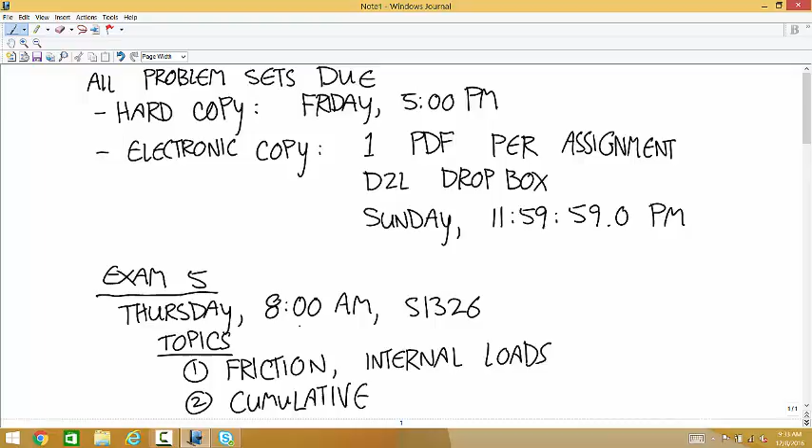And actually, we didn't do internal loads on the last one either, but you get the idea. So I said friction because you haven't turned in an assignment with friction. Some of you are like, I haven't turned in any assignments. But there's no assignment with friction on it. You're responsible for those problems yourself. It would be a really bad idea not to go through those problems, even though you're not turning them in.

And office hours next week. I'm going to keep the same ones. They'll work pretty well for the final schedule. So that's Monday, 3 to 6 in S1324. Tuesday, 1 to 2 in my office, 2302. And Wednesday, really it's 5 to 6. Let's say 3 to 6 in S1324. So I'll do the 2 extra hours on Wednesday. Usually that's short on Wednesday because I have a lab, but not next week. So you got a lot of chances to talk about this stuff before Exam 5.

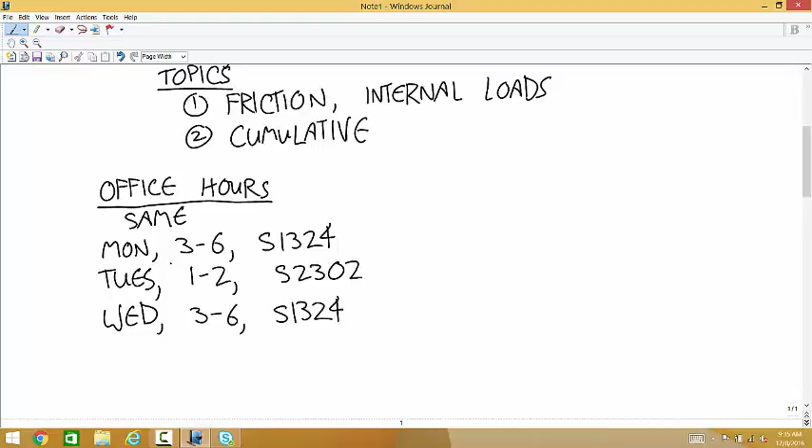Just to make things interesting, though, office hours next week, half the stuff I tell you is going to be wrong. Okay? Just to sweeten the plot thickens. You want to see if you can correct him? Yeah. And tell us the correct answer after. Okay, I'll tell you the right stuff. Any questions about anything the rest of the semester?

All right. So today we have to finish talking about friction. If we have time at the end of class, I'd be happy to talk about questions on homework or whatever, but let's make sure we get through the material we need to. So all that's left in friction is bearings.

And there are two types of bearings. Journal bearings, and here's what journal bearings are. You can think of it as like a pin joint is a journal bearing. Something that bears load. The two that we are going to deal with both involve rotations of axles. Okay, so what we have is an axle that's rotating in like a pin joint, you can think of it.

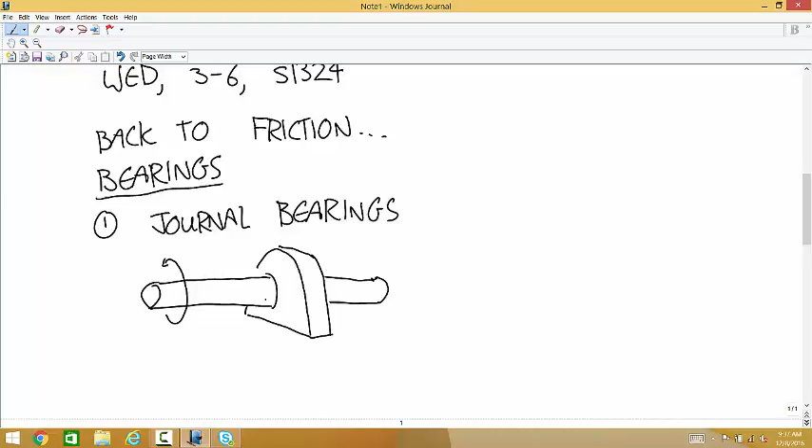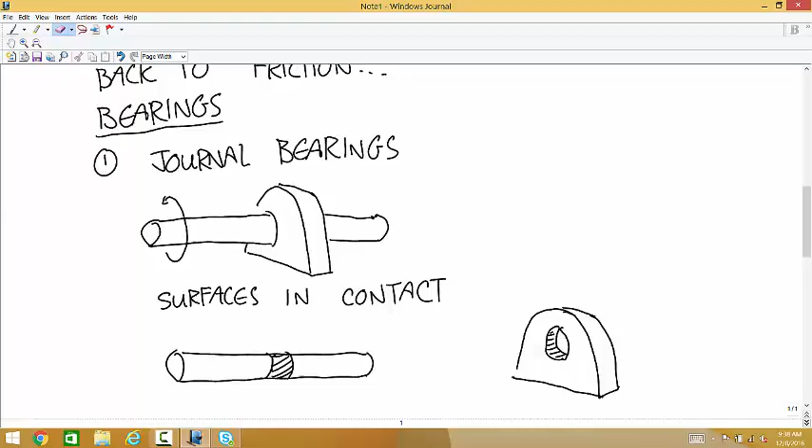And the surfaces of contact on the axle is this all the way around. And on the bearing is this. Okay, that's a journal bearing.

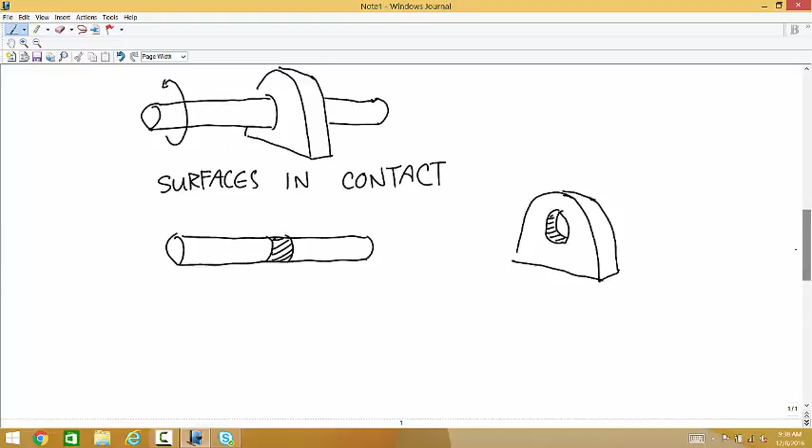And then the second type is a thrust bearing. And in that one, the axle's rotating this way. Well, it can be rotating either way. There has to be some force causing a contact between this and, in this case, say we're talking about like a wall.

It's hard not to draw that picture and make it look a little inappropriate, but let's all try to be mature people about this. So let's say we have this force. I was about to name that force P. I'm not going to do that. Again, because I'm so mature.

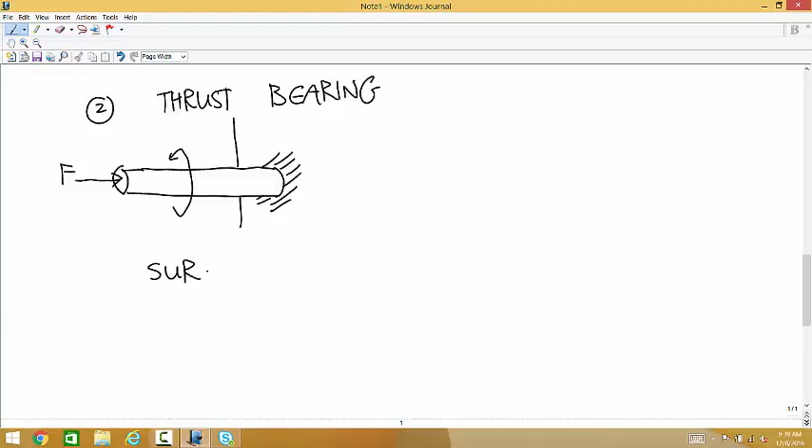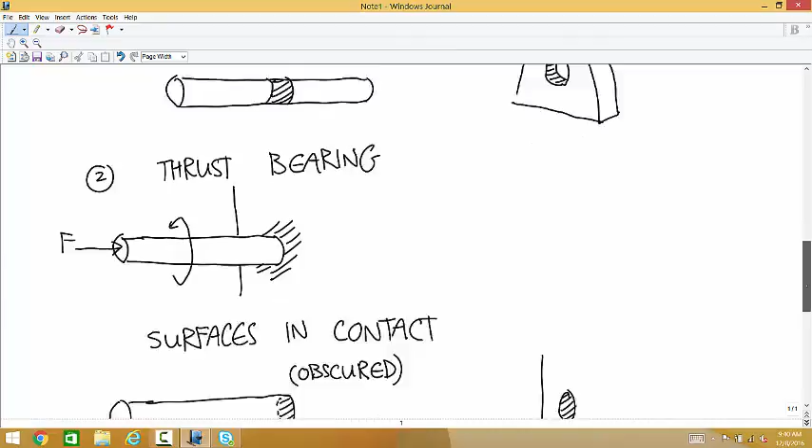And the surface is in contact. On this axle, well, the surface that's in contact on the axle is obscured, but it's this. And on the contact, it's this. Can everyone picture what these two different types of joints, these two different types of bearings are doing? I want you to notice one thing.

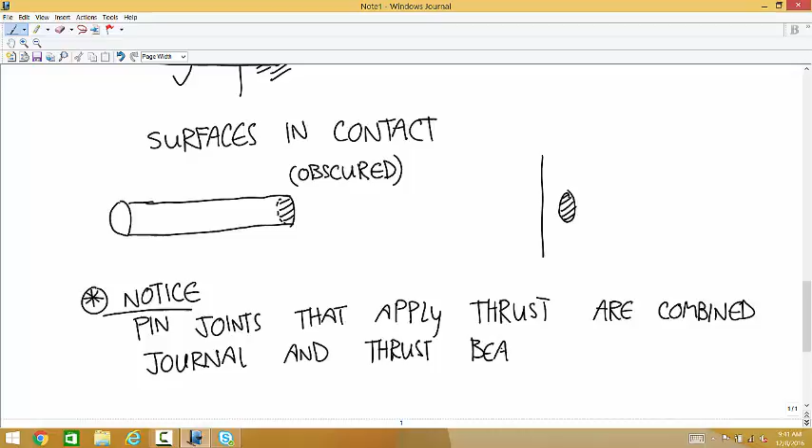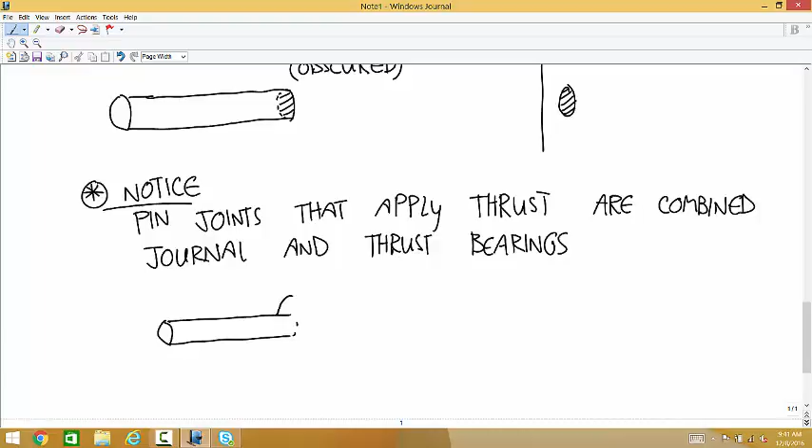Pin joints that apply thrust are combined journal and thrust bearings. So like an example would be, okay, so there's a little flange on here that keeps this from sliding this way or that way.

And if there's a force pushing these two together, I'll draw it here. Then, you know, as long as there's always going to be some kind of friction between surfaces. There's a contact surface between the inside of the pin and the outside surface of the axle. That's the journal bearing. And there's also contact between the wall of the bearing and the obscured side of that flange, and that's the thrust bearing. And then you'd have to deal with both of those two types of friction.

Yep. And when you say the obscured side of the flange, you're talking the inside. The inside, the part that's touching that bearing. Okay, so let's start with journal bearings.

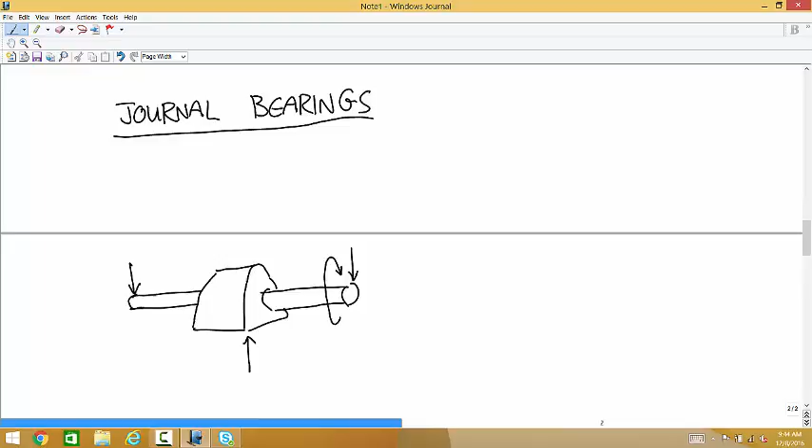Okay, so journal bearing, drawing it the other way, just to show off. And let's say it's rotating this way. And let's say that there is a force applied to each end of the axle. And there's a force applied to the bearing that's equal and opposite. So let's call this the weight W, and we'll call this W over 2, W over 2.

Let's think about it like this. This is fixed to the ground. That bearing is just attached to the ground. And so there's something applied up above whose weight is distributed on the two ends, and they're being supported by the fact that this bearing can't sink into the ground. Oh, so it's just a reaction to the floor. Yeah, right. And we're going to take a view like this. Poor sucker.

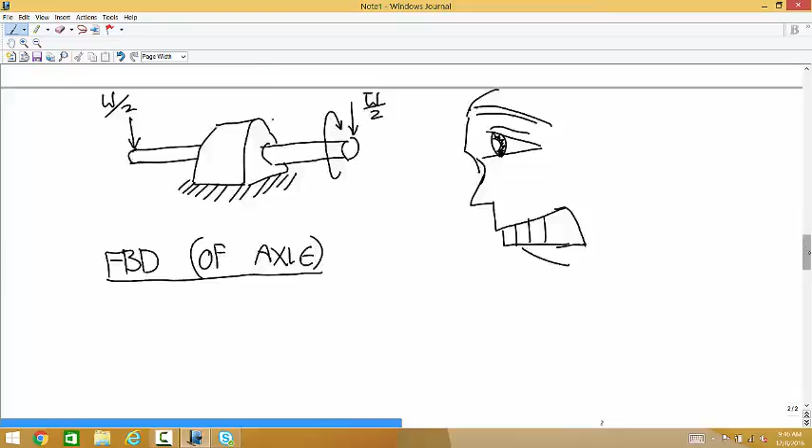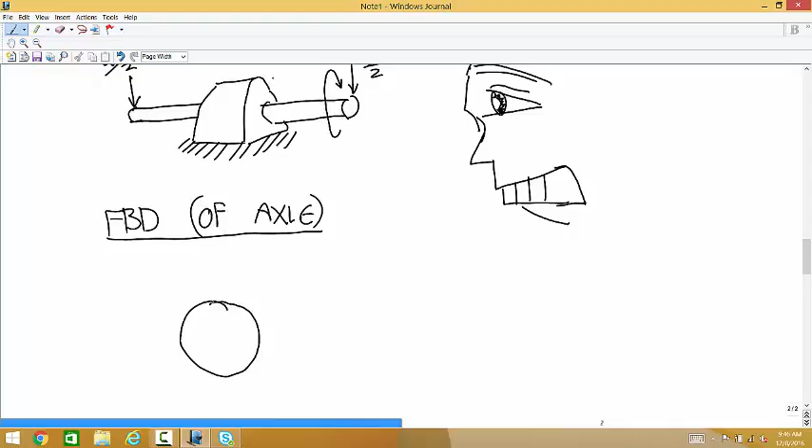Okay, and we're going to draw a free body diagram of the axle from his point of view. So what he sees is this. He's just looking straight down the axle. If we're doing a free body diagram of that whole axle, we have two of these forces, W over 2 plus W over 2 is equal to W. The axle is rotating this direction. And if there was no friction at all, the reaction force from the ground would be applied straight up through the center. Okay, and that would be static equilibrium. This spinning would happen freely forever with no additional torque applied.

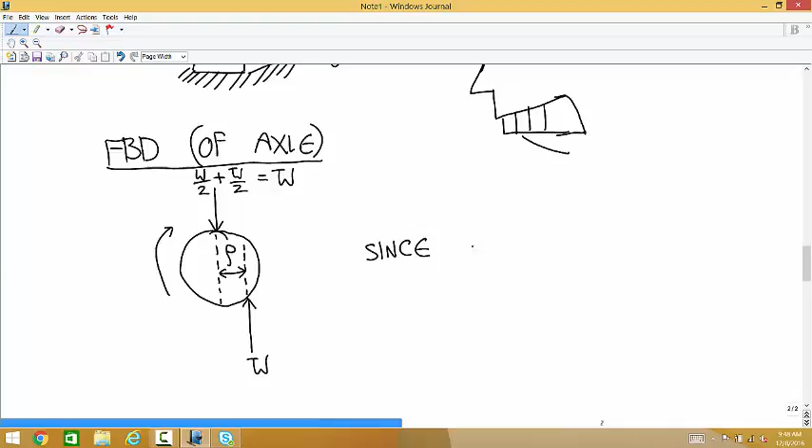But what happens due to the friction is, if you're representing the force applied to the axle by the bearing as a single point force, that point force drifts to the front. And you end up with a W applied offset from the center like that. And because this applied force is offset from the center by some amount rho, that force W produces a moment. Since that W force doesn't have a line of action through the center, it produces a moment.

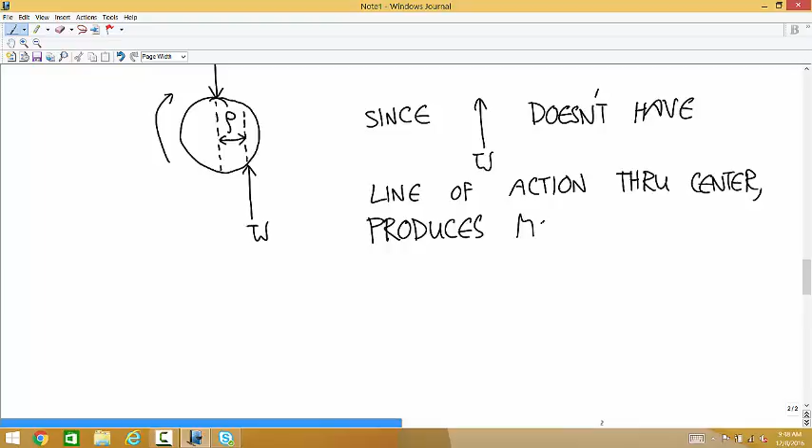The reason is, where is this axle in contact with the bearing? Well, it's in contact everywhere, the whole way around. But we're representing that whole distributed load as a point force, which we've used that idea before. And if you experimentally measure where that point force is that gives you an equipollent system, what you would see is that as this thing spins, that point force drifts towards the front. You can think of that as an experimental result. Okay.

Just out of curiosity, if you had a free body diagram like this, could you have a distributed load around the entire thing with a circular object like this? Yes, you could. We just haven't talked about how to do it. It's not terribly hard to do. You just have to think about distributed load vectors instead of single direction distributed loads, and then you have to deal with the components.

If the axle spun the other way, would the W be on the other side? Yes. It has to be on the side where that moment slows down the rotation. You know what I mean? So if you could figure out a way to make it spin this way and have the W act over here, you have a perpetual motion machine. That's awesome. Okay? You can take the rest of the day off. Right, really. Exactly. That moment is what slows down the rotation.

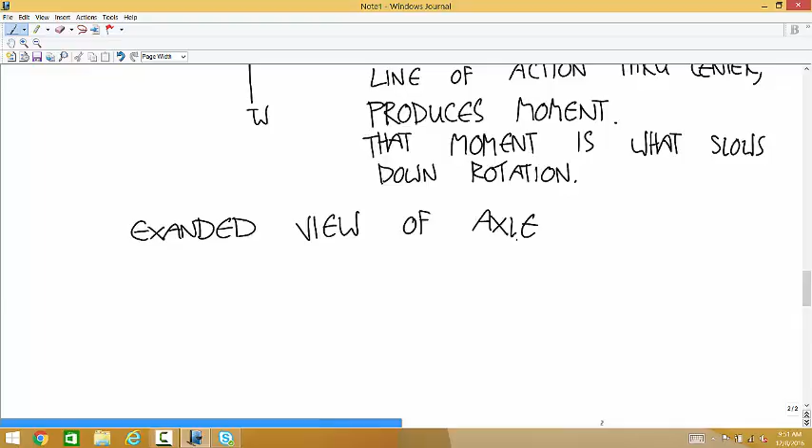Okay, so let's look at an expanded view so I can look at some details of all the angles and distances and stuff. An expanded view of the axle. So here's the center. There's the center line. And there's a force W that's applied here. We also have this W applied from the top. And that force W is made up of two parts. Oh, and this distance here is rho.

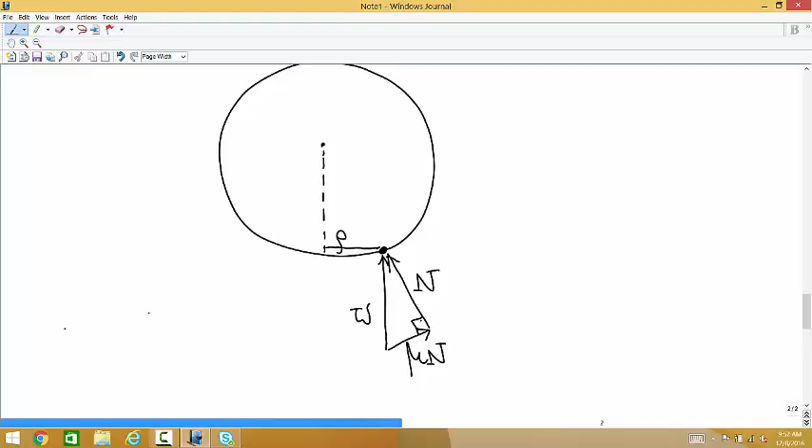So this W is made up of two pieces. A normal force and a friction force perpendicular to the normal. That's equal to the coefficient of friction times the normal. These are perpendicular. So based on what the coefficient of friction is, we can figure out what this angle is. Okay? It's not clear yet why we want to do that.

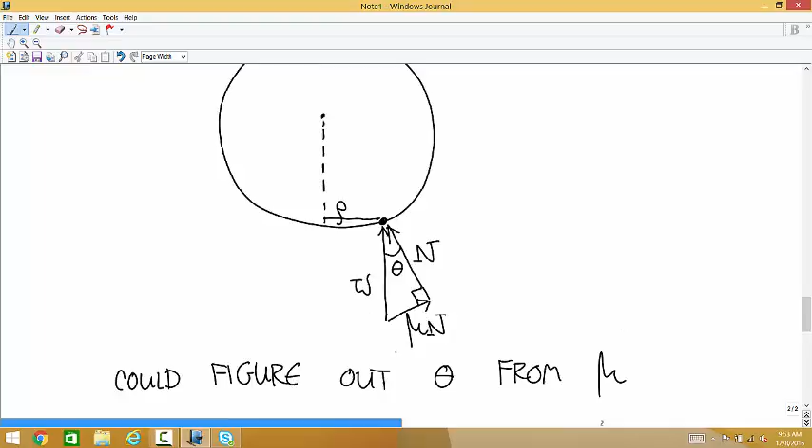Could figure out theta from that coefficient of friction. Can you also figure out theta just by having n? Well, we don't have a way to calculate n. But yes, you're right. If you measured that, that would be enough too. But mathematically, we can just figure it out from what the coefficient is.

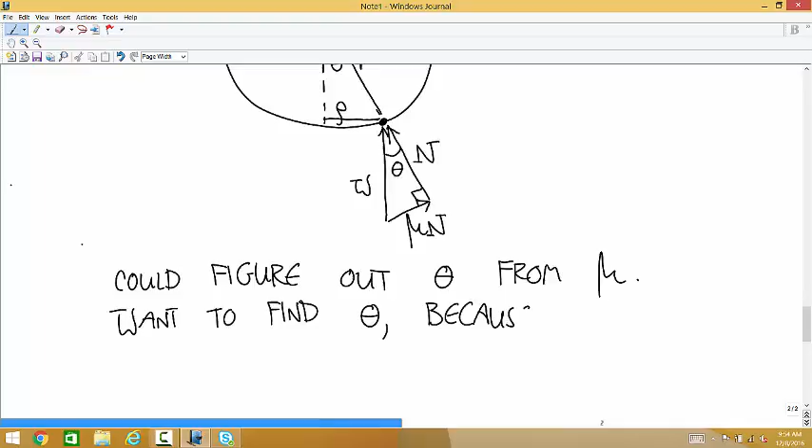Okay, so why would we want to figure out this angle theta? Well, the answer is that angle theta is also equal to this angle theta. And the hypotenuse of this triangle is just the radius of that axle. That's easy to measure. And we want to find theta because that rho that we need to calculate the moment is just equal to r times the sine of theta.

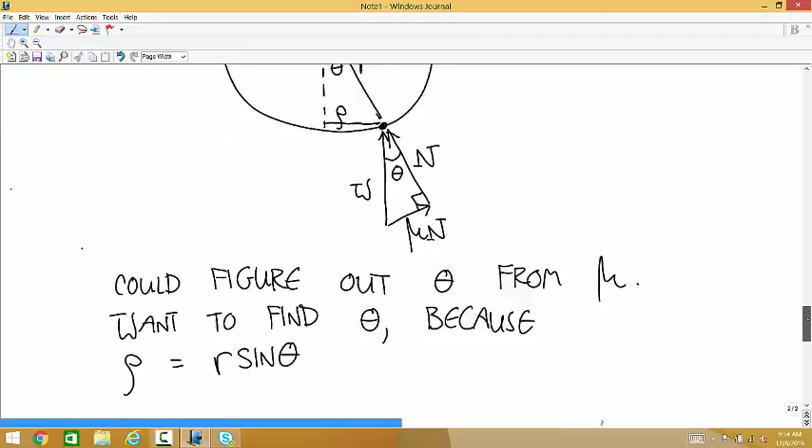You see that? That's just right angle trig. Okay, so let's think about this triangle, come up with an expression for theta from this, plug it into this to get rho, and then we'll calculate that moment. Okay, so first, find theta in terms of the coefficient.

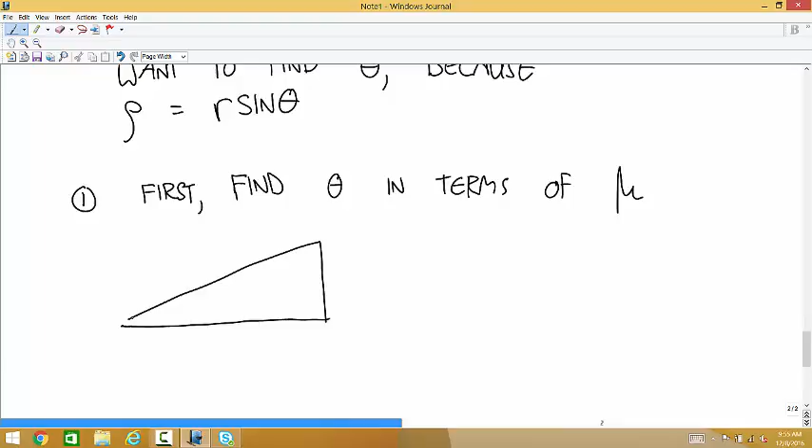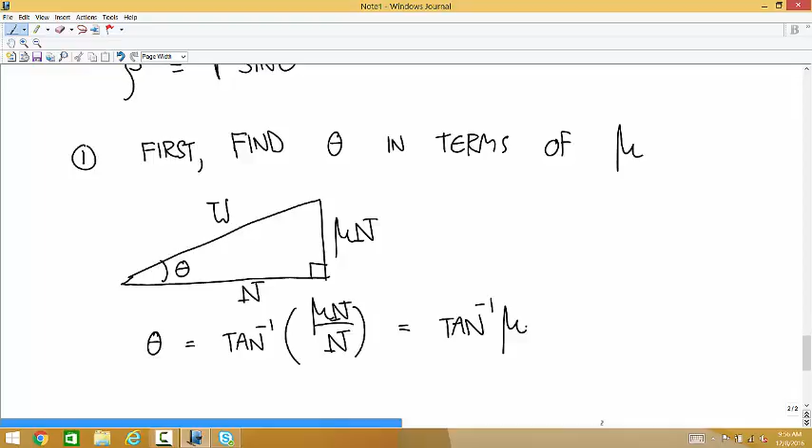So we have a triangle like this. There's our theta. The hypotenuse is W. This is N. This is mu N. And so theta is just equal to the inverse tangent of mu N over N. Those N's cancel, and you just get inverse tangent of mu. And then the second step is now express the moment due to friction in terms of this coefficient of friction.

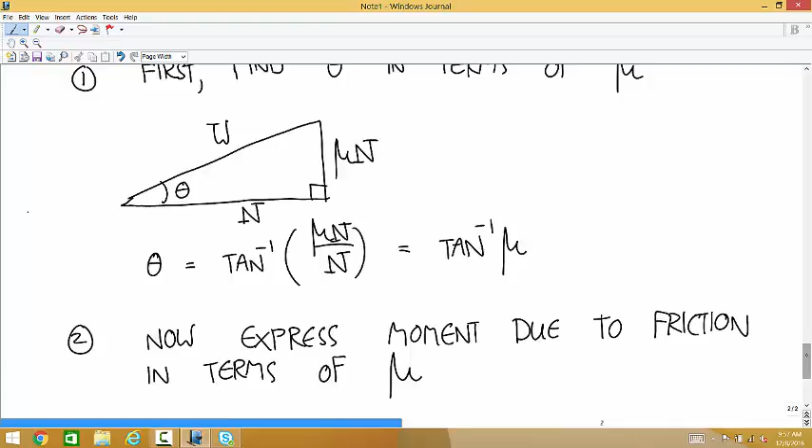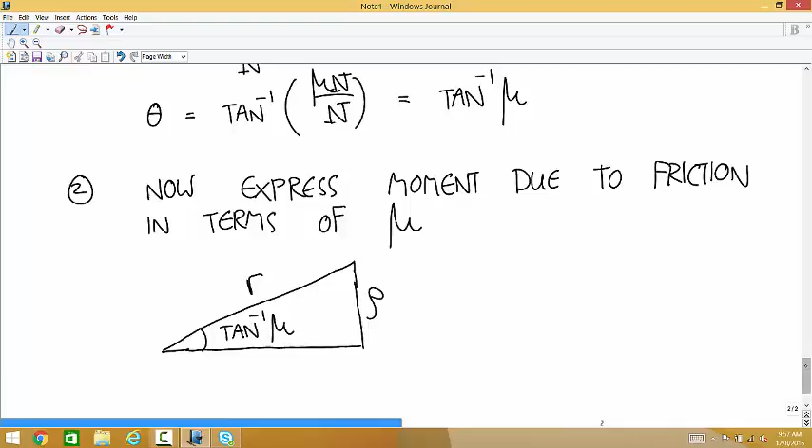So we have a triangle with an angle that's equal to the inverse tangent of mu. This is rho. The hypotenuse is the radius of the axle. And so rho is just equal to r times the sine of the inverse tangent of mu. And you might remember somewhere in the recesses of your mind that you can simplify stuff like this.

So let's set up a right triangle. If you don't like simplifying stuff, you don't like math, you probably shouldn't have gone into engineering. But I'm not here to judge you. If you don't like doing the math, you could just calculate the inverse tangent on your calculator, keep 15 decimal places, take the sine of that, and that'll work fine. But we can come up with a closed expression for a simplified thing.

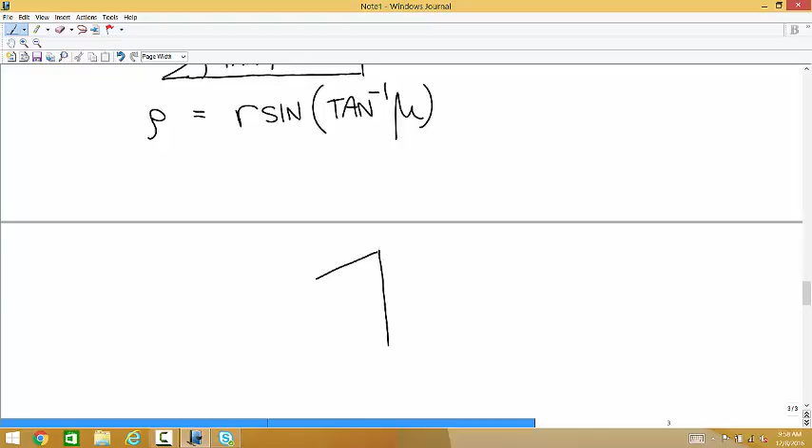So here's a triangle that has an angle of the inverse tangent of mu. I'm just coming up with any right triangle that has this angle. So this is mu, and this is 1. Check that works out. The tangent of this angle is mu over 1, and so if you take the inverse tangent, you get that angle. I talked myself backwards. You know what I mean, though.

Okay, so what's the sine? Well, to get the sine, we need to come up with an expression for the hypotenuse. So what's the hypotenuse of this triangle? We're just going to use the Pythagorean theorem: the square root of 1 squared plus mu squared. And then what's the sine? Mu over this. So the sine of the inverse tangent of mu is equal to mu over the square root of 1 plus mu squared.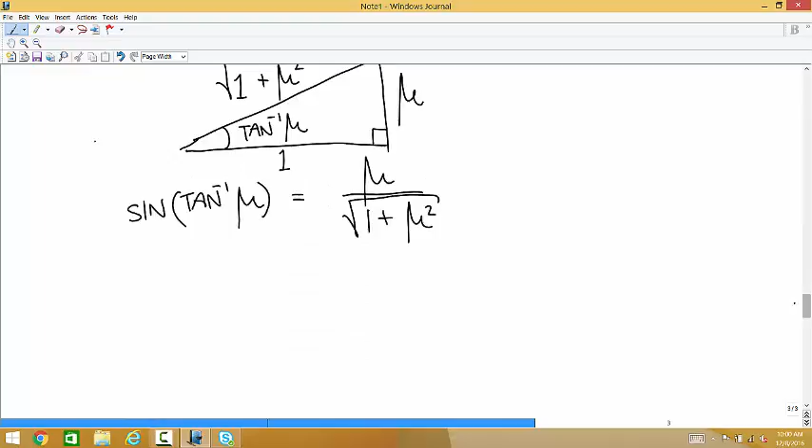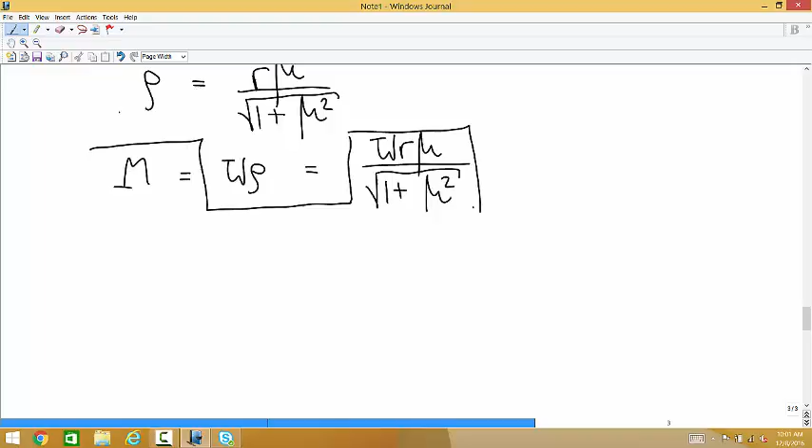So this rho value, that moment arm, is equal to r times this. And so the moment that's slowing this axle down is the weight times rho, which is weight times r mu over the square root. That's the moment that friction applies that slows down the rotation. And so another way to think of that is you would have to apply an equal and opposite moment externally somehow to keep this axle rotating with a constant angular velocity.

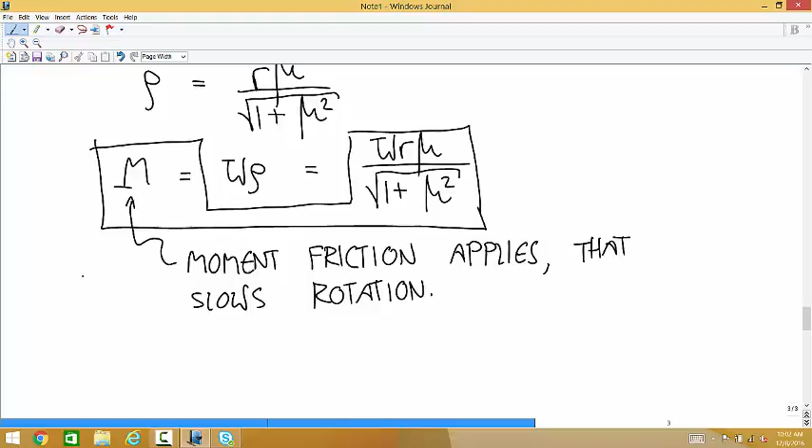Any questions about that? Okay, so let me do an example. The way you're going to do problems is you're going to go through this derivation. So I'm not going to give you this formula. On the test I'm not.

Do we have to derive it every time we do the question, or can we just memorize the end formula and then solve? I suppose if you memorize it, there's nothing I can really do. I didn't know if it was going to be for points or something. I would recommend that you just follow the steps.

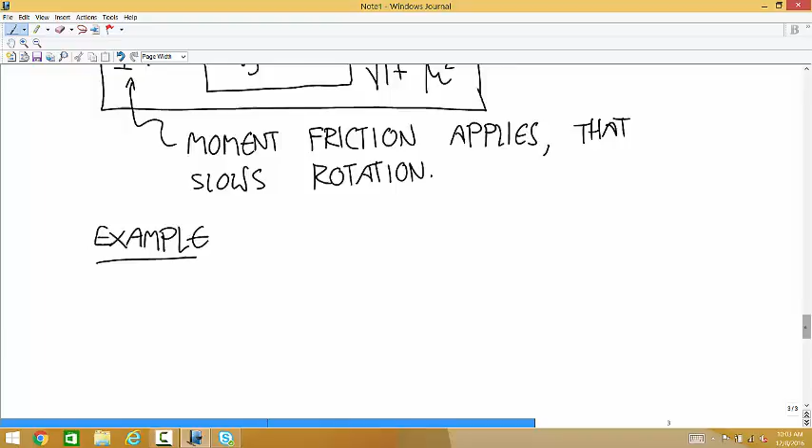Actually, one quick question. Why can we use the result of the sine of tan inverse of mu from the different triangle to get the result of the one that we were looking at previously? Because we're just trying to figure out a relationship between angles. Any triangle you make that is similar to this, that has an angle of tan inverse of mu, would give you the same value for the sine once you divided out the factors.

But wouldn't we have different values for each of the sides? Yeah, but since sine is opposite over hypotenuse, you'd have a multiplying factor on the opposite side and on the hypotenuse side. They'd cancel out and you'd get the same thing. What if you had this triangle multiplied by 500? Then this would be 500 mu. This would be 500 times the square root of all this stuff. And the 500s would cancel, you get the same thing.

What I'm saying is, through the Pythagorean theorem, we derive the square root of 1 plus mu squared. Wouldn't those values by definition be different in another problem?

Okay, so think about a triangle that has 500 times the length. When you did the Pythagorean theorem to get the hypotenuse, this would be 500, so you'd have 500 squared plus 500 squared. You could just pull the 500 out, and you'd have a hypotenuse equal to 500 times this square root. And then when you took the sine, the 500 here would cancel the 500 here. So no, it wouldn't be different. Any similar triangle has those same sine and cosine relationships.

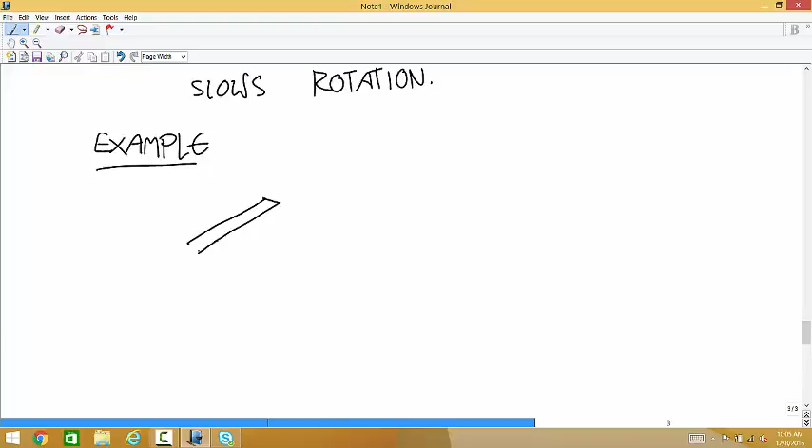Okay, so let's say we have a bearing. I'm going to draw it upside down, but then when I go into the problem, I'm going to do it exactly the same way. I'm just drawing it upside down to show that you don't have to really worry about that when you do these calculations.

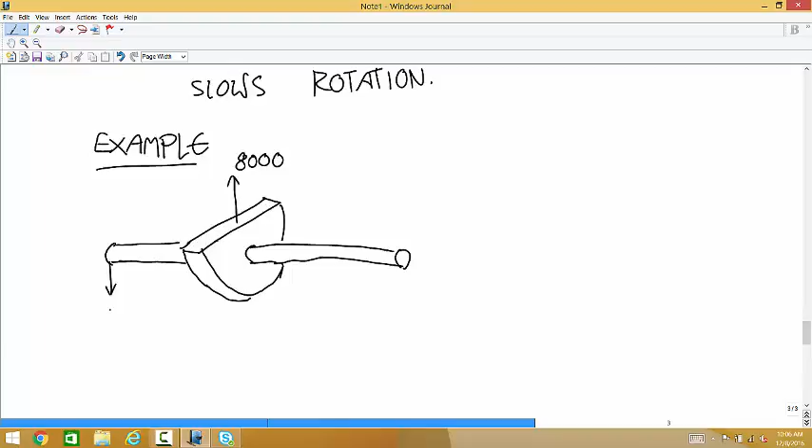And let's say that there's an 8,000 Newton force pulling up on the bearing, 4,000 Newton forces on the two ends of the axle. The diameter of this axle is 0.06 meters, 6 centimeters. And let's say that the surface between the axle and the bearing has a coefficient of static friction of 0.05 and a coefficient of kinetic friction of 0.02.

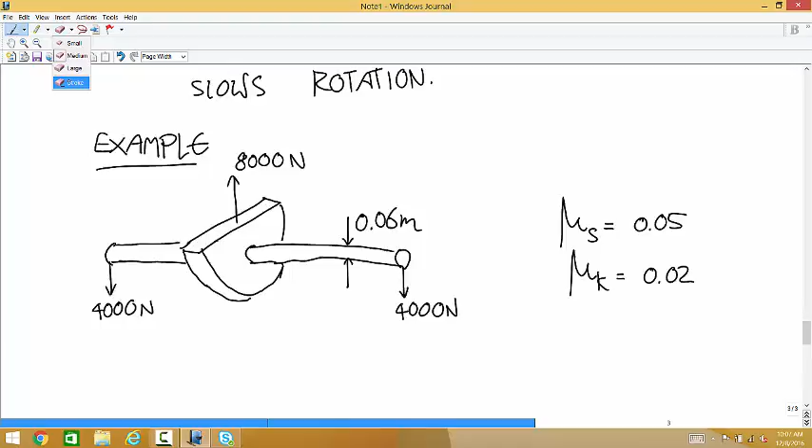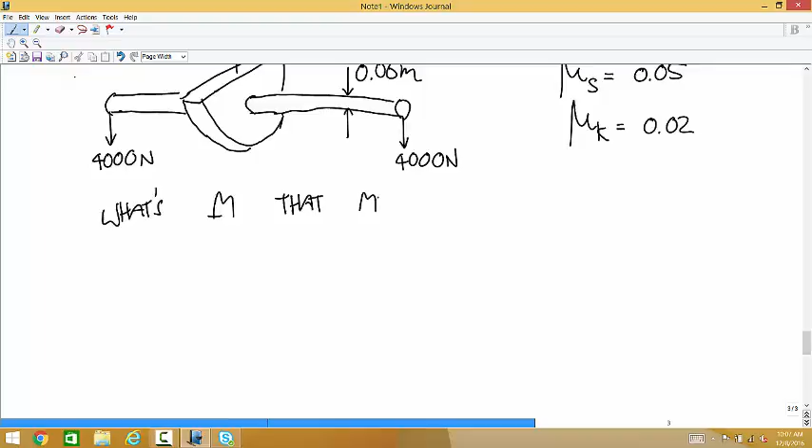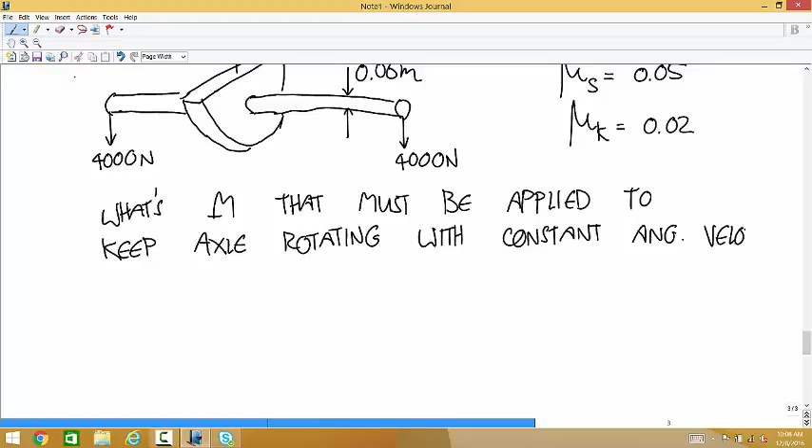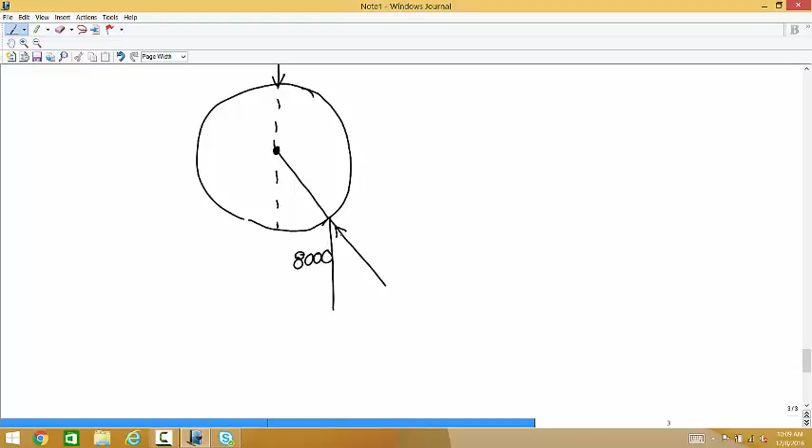And we want to know what's the moment that must be applied externally to keep the axle rotating with a constant angular velocity. So I'm going to do a free body diagram of the axle in that side view. So there's an 8,000 Newton force acting down. There's an 8,000 Newton force acting up here. There's a normal force N. There's a perpendicular friction force.

And if you look up friction coefficients in a table, there's always two values. Which one do we want to use, static or kinetic? Kinetic, because we're talking about something that's already moving and we're trying to maintain that motion. So this is 0.02 N. This angle is theta. This angle is theta. And what we're trying to get to eventually is this value rho. This R here is 0.03 meters.

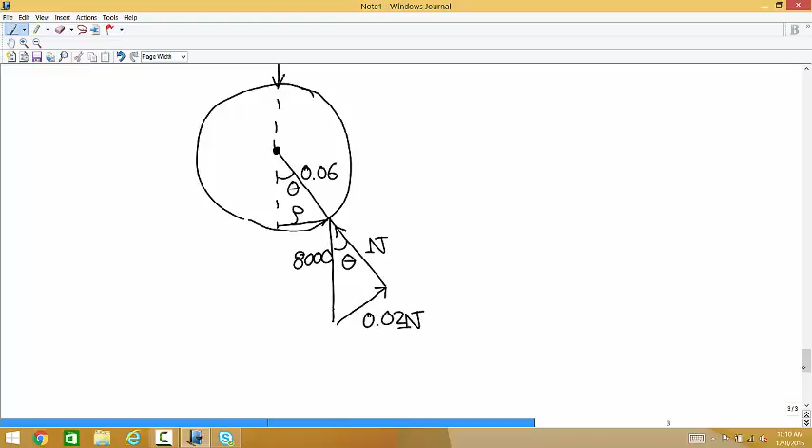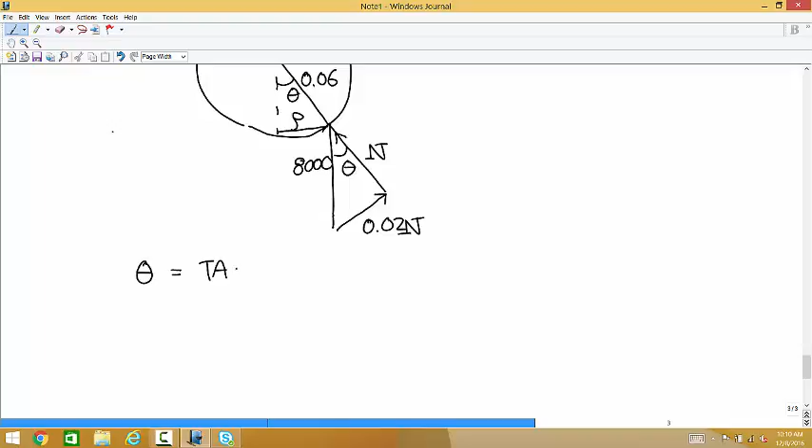So theta is equal to, question? The diameter was correct. Oh yeah, you're right. Thank you. Yes. So this should be 0.03. So theta is equal to the inverse tangent of 0.02 N over N. So 0.02. And so rho is equal to the radius, 0.03, times the sine of the inverse tangent of 0.02.

And you get a value for that of about 6.0 times 10 to the minus 4 meters. So it's a pretty small distance that that reaction force moves away from the center line.

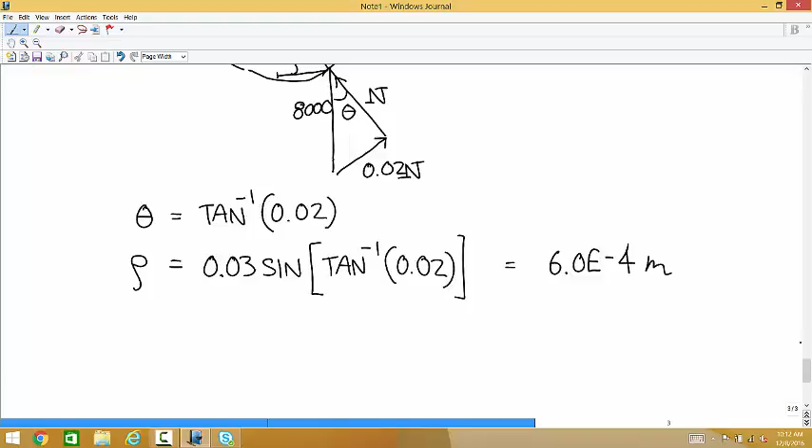Should this be in degrees or radians? It should be radians. Yeah, let me just make sure. It doesn't matter. Because if you calculated this angle in degrees, then you'd calculate the sine of that angle in degrees. So either one is fine.

And now finally, the moment is equal to that force of 8,000 times the moment arm of 6.0 times 10 to the minus 4. And you get a value of 4.8 Newton meters. So in order to keep this axle moving with a constant angular velocity, you have to apply about 5 Newton meters to keep it going. Otherwise, friction is going to slow it down. Any questions about that?

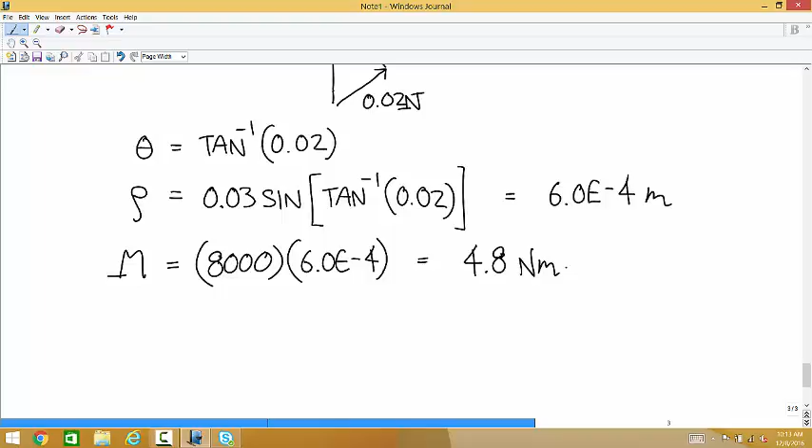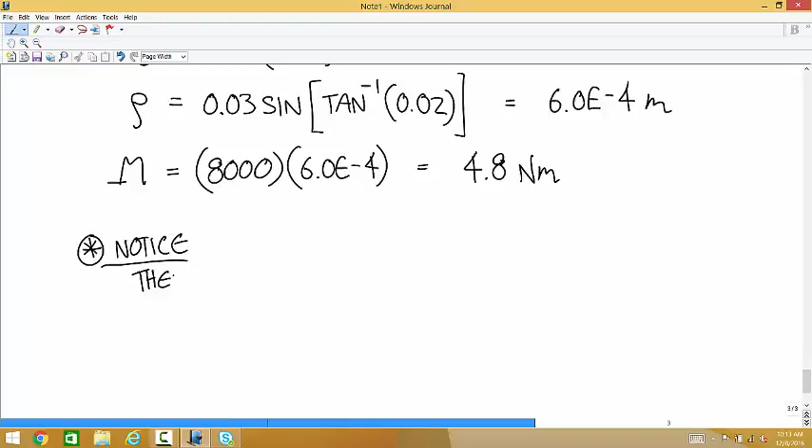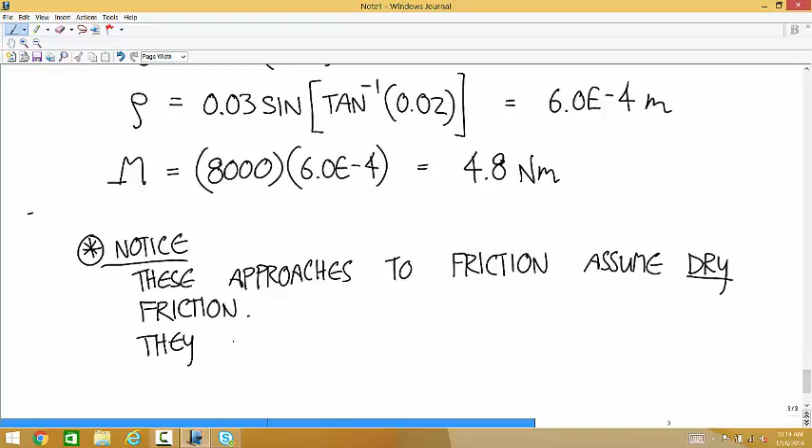One thing to notice about all of these friction problems, these friction approaches assume dry friction. So these apply to dry lubricants, graphite powder or whatever, but not joints that are saturated with oil. And the reason is that if you have a viscous liquid in the joint, the math of how friction is developed is different. It doesn't just depend on the normal force anymore. It depends on the speed of rotation. So you need a different approach if you're using oil.

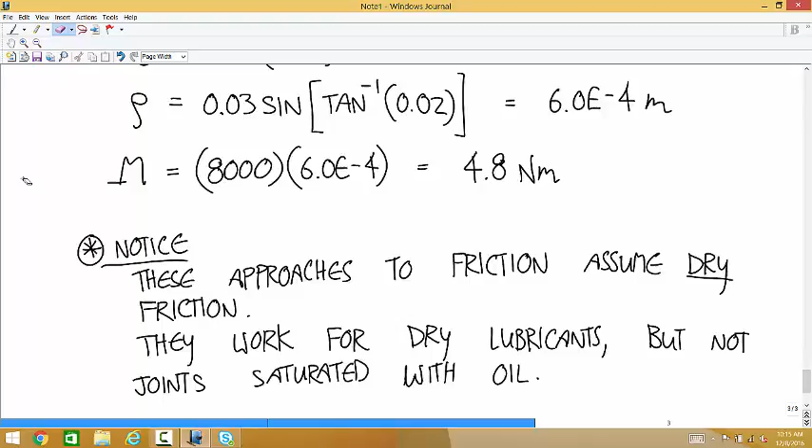Why wouldn't that just be factored into the coefficient of friction, though? Well, yeah, because it changes based on the speed of rotation. So you could do it, I suppose, if you know what speed this is going. You could probably approximate in some way, but that's something to be careful about with this. The math of this deals with dry friction.

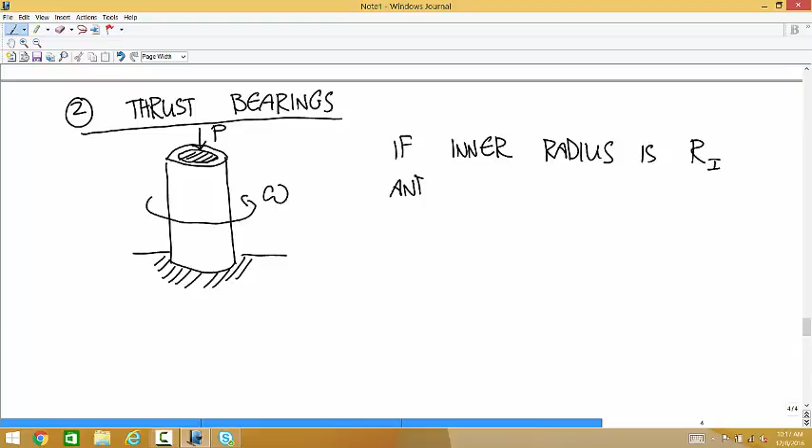Okay, the other type of bearing, the second type, is thrust bearings. And I'm going to go through a derivation of the moment developed by friction when a hollow cylinder is rotated. I'll call this force P. The angular velocity is moving in this direction. If the inner radius is R inner, Ri, and the outer radius is Ro, what's the moment produced by friction?

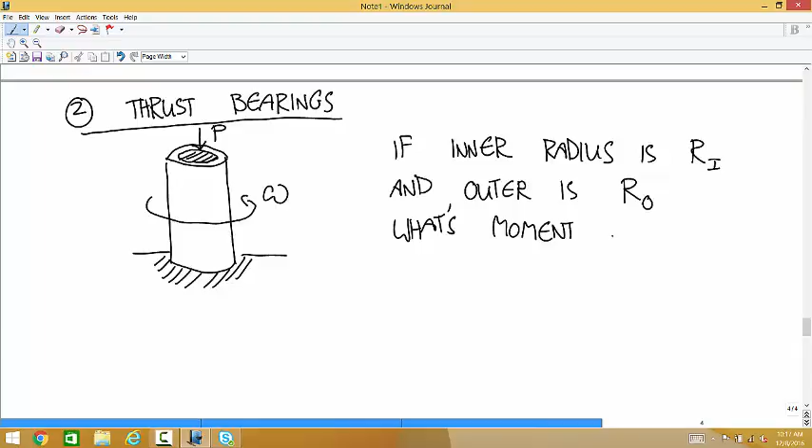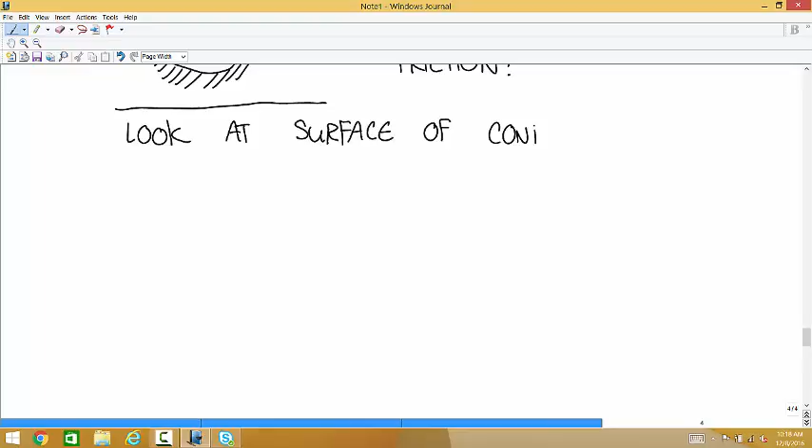We're going to set this up as an integral derivation. So let's look at the surface of contact. It's a hollow circle where the radius of this one is R inner, the radius of this one is R outer.

And the reason that we have to set this up as an integral derivation is that if you think of thin rings of material, every one of those thin rings has the normal force at this contact distributed the same way. So each one of these thin rings has the same amount of force applied to it, but each one of these rings is a different distance from the axis of rotation.

And so even though the force is the same over a ring like this, a ring like this, or the pressure anyways, the force per area, they have different moment arms, and so they're producing different moments. So we're going to have to come up with an expression for the moment produced by some arbitrary thin ring, and then we're going to have to add those all up through integration.

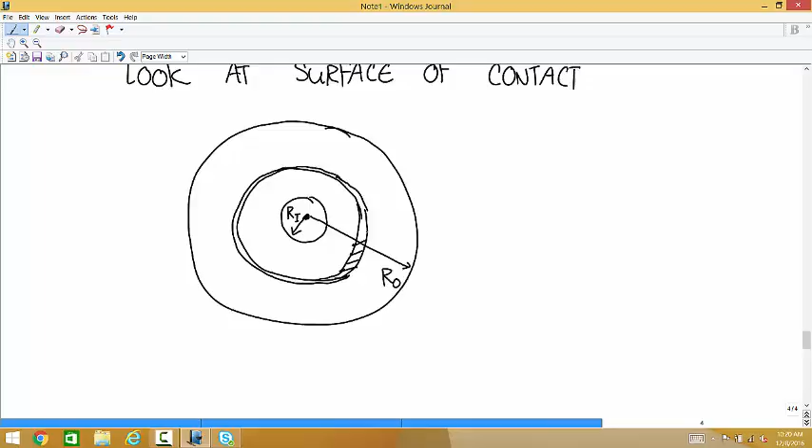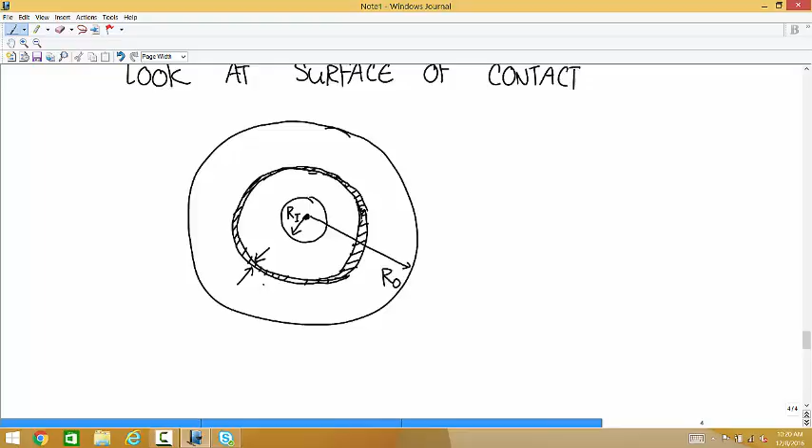And so here are the steps to follow. We're going to use this as kind of our representative thin ring. So it's a circular ring with a constant radius. The thickness of this ring is d little r. The distance from the center of the axis of rotation to the thin ring is r. And what we're going to do is come up with an expression for the moment that's produced by this contact.

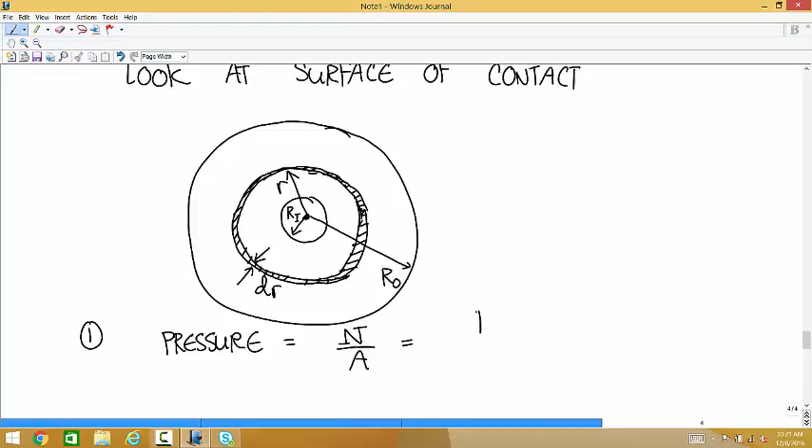Okay, so step one, we're going to first figure out the force per area. So the pressure is, you can think of it as the normal force divided by the total area. The normal force is P. The total area is just the area of a hollow circle, so that's pi times r outer squared minus r inner squared. And so every unit of area applies a force this big. And now we're going to use that pressure to find the infinitesimal amount of normal force spread out over that infinitesimal ring.

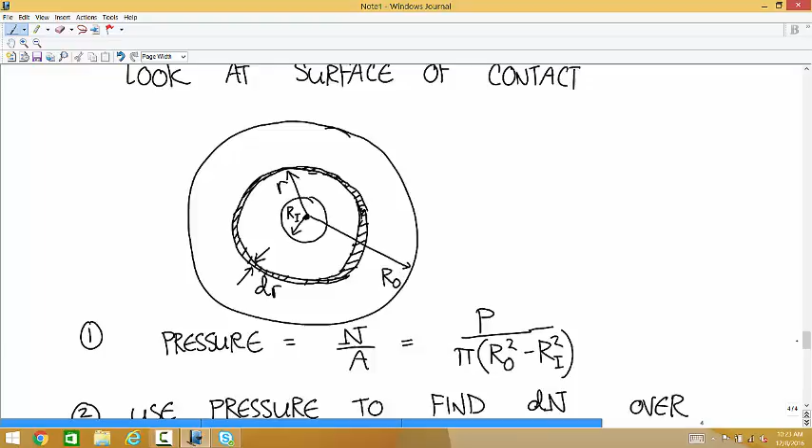Okay, so to figure out the total force over that infinitesimal ring, we're just going to take the pressure and multiply it by the area of that infinitesimal ring. So you can think of dN is equal to the pressure we just found times the area in that infinitesimal ring. And we can represent the area in that infinitesimal ring in terms of r. If we think of taking that ring and disconnecting two ends and stretching it out, that's a trick with these kinds of problems that you use over and over again. Then what you have is a thin rectangle with a thickness of dr and a length equal to the circumference. So you have P over pi times the quantity r outer squared minus r inner squared times 2 pi r dr.

Any questions about that step? We're just taking the pressure we found and multiplying it by the area of one representative infinitesimal ring. And now that we have the normal force, remember it's not the normal force that applies the moment, it's the friction that depends on that normal force. So third, use that normal force to find the infinitesimal force of friction applied by that ring. dF friction is just equal to the coefficient of friction times dN, which is, I'm going to rearrange some of this stuff, 2 pi times mu times P times r dr divided by pi times the quantity r outer squared minus r inner squared.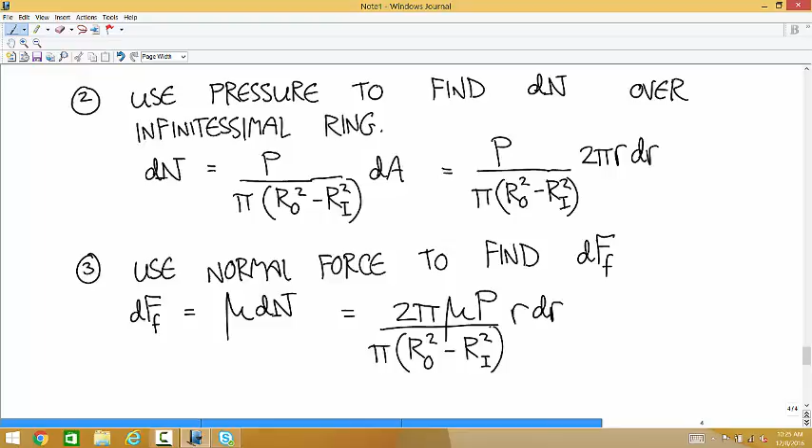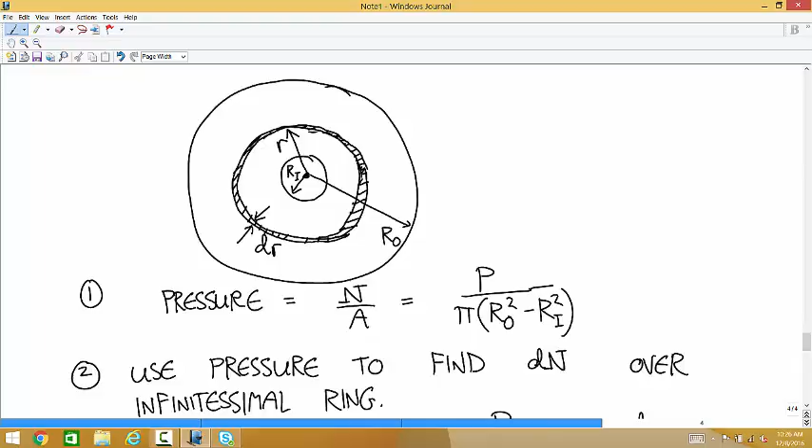Any questions about that? Okay, so that friction force now, at every place along this infinitesimal ring, is tangent to that ring. And so to come up with the infinitesimal moment produced by that ring, you're just going to multiply that friction force times this distance r from the axis of rotation. So fourth, use this infinitesimal force of friction to find dM. dM is just equal to r dF friction. And so now we have 2 pi mu P over pi times the quantity r outer squared minus r inner squared, all times r squared dr.

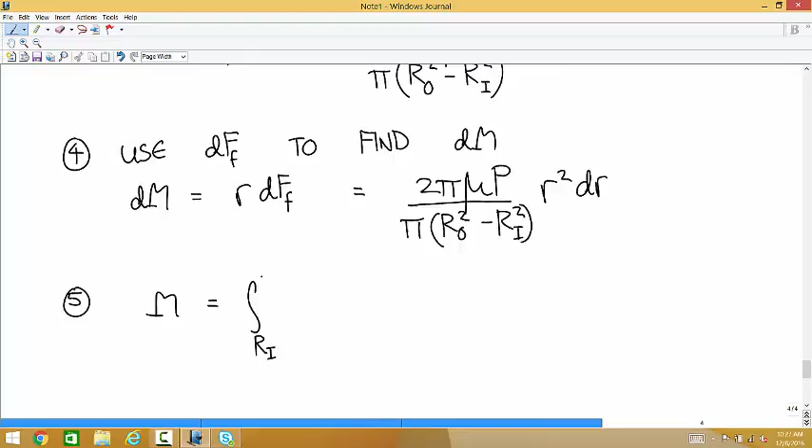And then the last step is just to integrate. Now we have the moment produced by an infinitesimal ring. We just have to integrate over all the infinitesimal rings. So the total moment is just equal to the integral from r inner to r outer of dM. So the moment is equal to, I'm going to pull all the constants out of the integral, 2 pi mu P. Oh, these pi's cancel. Let me get those out of there. So 2 mu P over the quantity r outer squared minus r inner squared times the integral from r inner to r outer of r squared dr.

So 2 mu p over the quantity r outer squared minus r inner squared. When you integrate this, you're going to get a coefficient of 1/3, so I'm going to pull that out too. And we have r outer cubed minus r inner cubed. It sort of looks like there might be some simplifying you could do, but there isn't. Any questions about that?

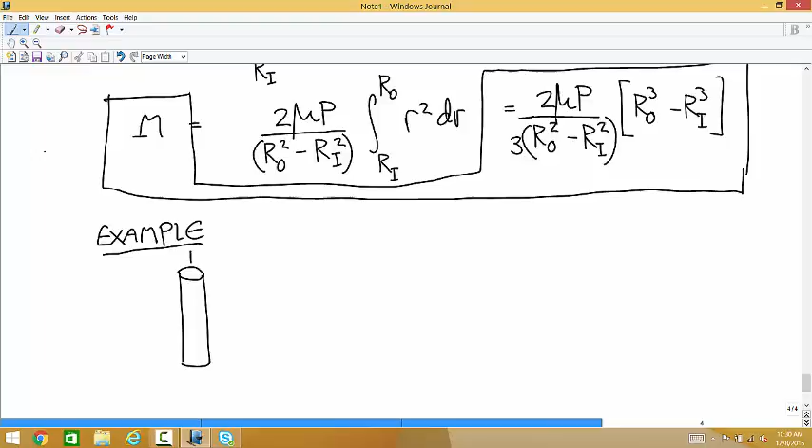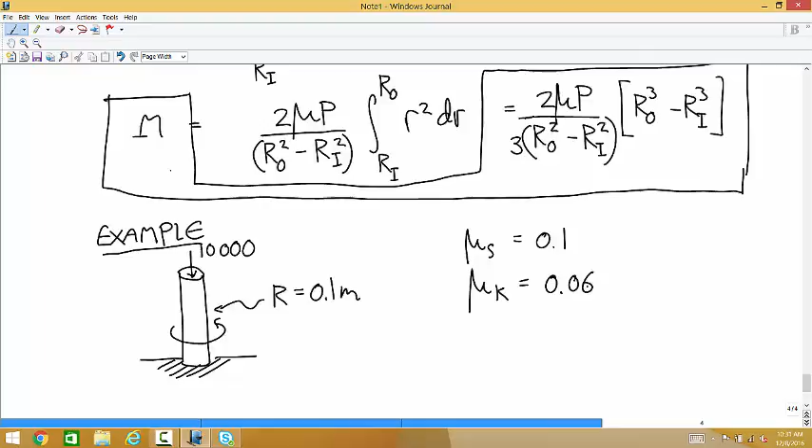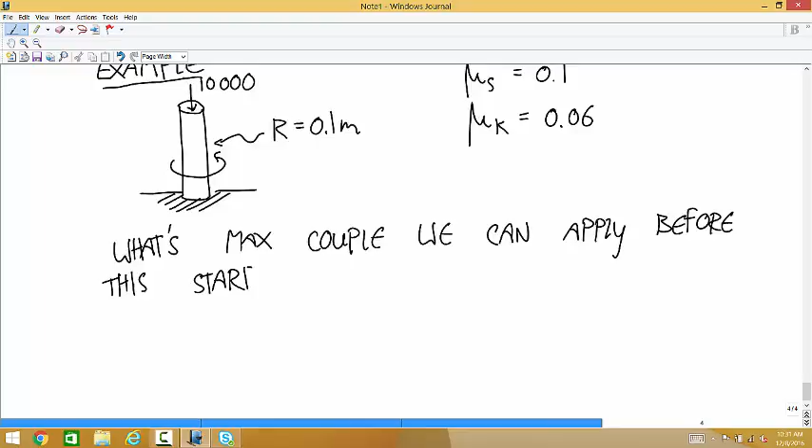Okay, so let's say, as an example problem, you have a 10,000 Newton force pushing down on this axle. It's solid all the way through, it's not hollow, and that radius is 0.1 meters. The contact between the ground and the axle has a coefficient of static friction of 0.1, a coefficient of kinetic friction of 0.06, and we want to know what's the maximum couple we can apply before this starts to rotate. Okay, so what coefficient do we want to use for this problem? Yeah, this time we want to use static because it's at rest and we're trying to figure out when motion starts.

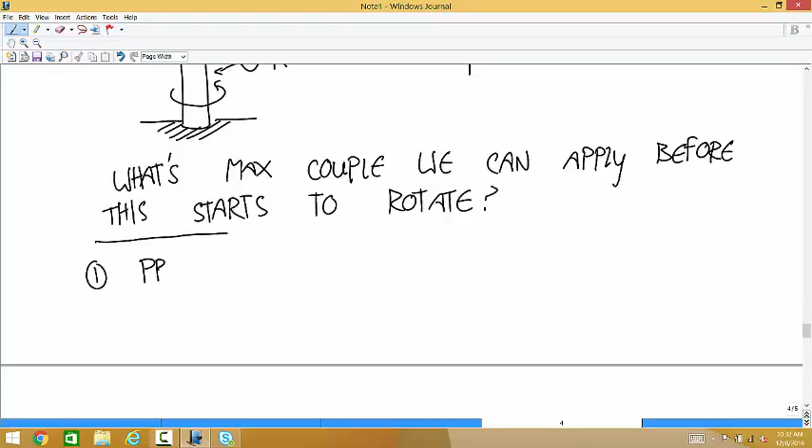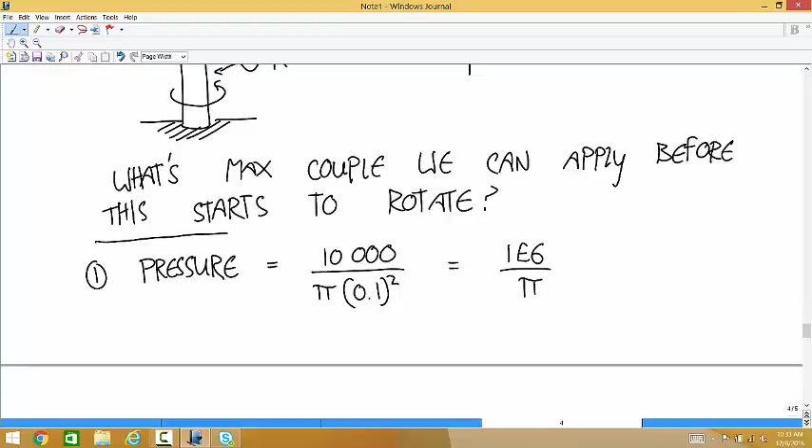So step one, the first thing we need to do is figure out the pressure. So the pressure is equal to the total force of 10,000 divided by pi r squared. I'm going to keep the pi in there because they're going to cancel out. So that's 1 times 10 to the 6 divided by pi. And now the next step is to figure out the infinitesimal force applied on a given infinitesimal ring inside this thing. So to do that, we're going to multiply the pressure times the area.

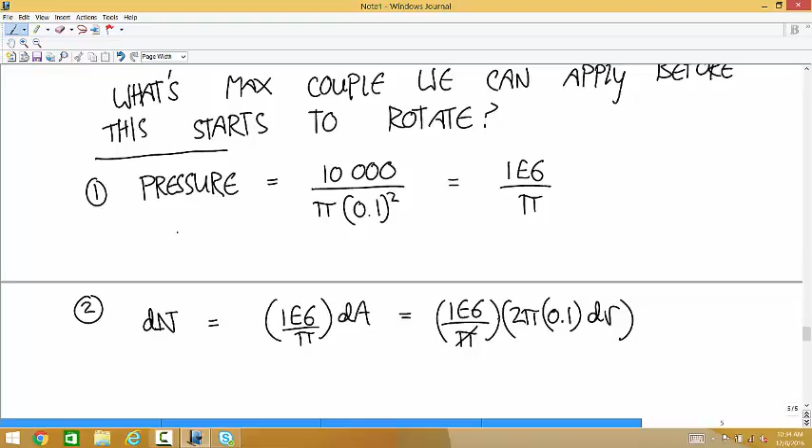So our dN, the infinitesimal normal force, is equal to 1 times 10 to the 6 over pi times dA, the area of that infinitesimal ring. So that's 1 times 10 to the 6 over pi times 2 times pi times the radius dr. And now those pi's cancel. Wouldn't that dr be over the entire thing? It seems you put the dr in the parentheses. It doesn't matter. Okay. So you get 2 times 10 to the 6 times r dr for the infinitesimal normal force. Would that be a lowercase r? Like 2 pi r? Yes, thank you.

And now we're going to use that to figure out the infinitesimal friction force applied by that ring. So dF is equal to the coefficient times the infinitesimal normal force. That's 0.1 times 2 times 10 to the 6 times r dr, or 2 times 10 to the 5 r dr. And now the moment produced by that friction force, dM, is equal to r dF. And so we get 2 times 10 to the 5 times r squared dr.

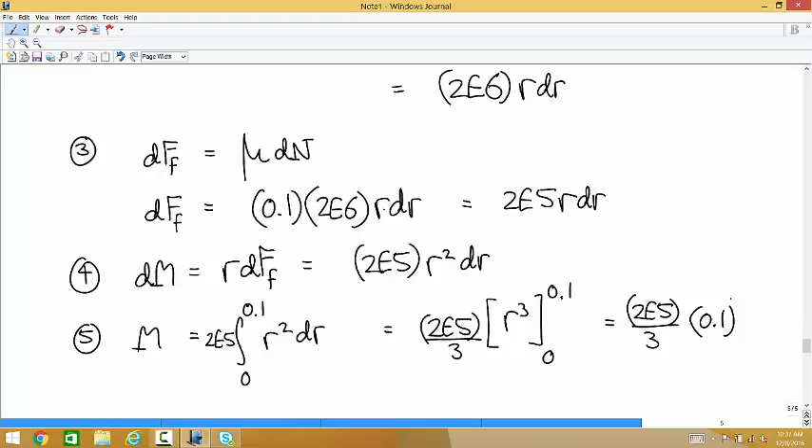And then the last step is to integrate this over the boundaries. So the total moment is the integral from the inner to the outer. This time the inner is 0. The outer is 0.1. Of 2 times 10 to the 5 times r squared dr. So you get 2 times 10 to the 5, I'll pull the 3 out, and we have r cubed evaluated from 0 to 0.1. And that's 2 times 10 to the 5 divided by 3 times 0.1 to the third. And so the total moment is 66.7 Newton meters. So if you apply a moment to this axle bigger than 66.7 Newton meters, it'll start to rotate.

Any questions about that? Anyone have a feel for, if you take an Allen wrench and really crank on it, about how much torque are you producing? Like, to put this in context? In Newton meters, you're probably more used to pound inches or foot pounds or something. I had to use a big torque wrench in the bottom of my car, about 60 Newton meters or so. Yeah, right. I'm more familiar with bike stuff, so using a little Allen wrench, about 10 Newton meters is pushing pretty hard on that. If you get a big lever arm, you can get bigger, but 66.7 is a pretty big torque if you're applying it by hand. Like pulling the bottom of the car. Yeah, right. Thing moved.